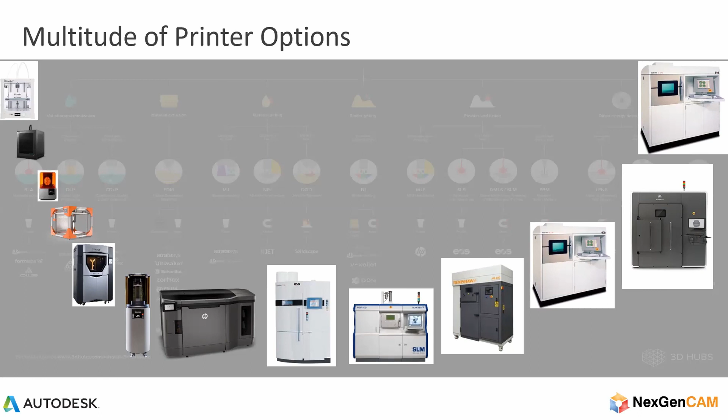Another challenge that we're seeing is failure. It's interesting the way that the 3D printing market started is kind of entrepreneurial and everybody's doing it. It's so exciting to be able to print something instead of making something in the traditional way. And we've all kind of settled in and people are comfortable with the current state of the industry where you might print 3 or 4 bad prints before you get the one that you like.

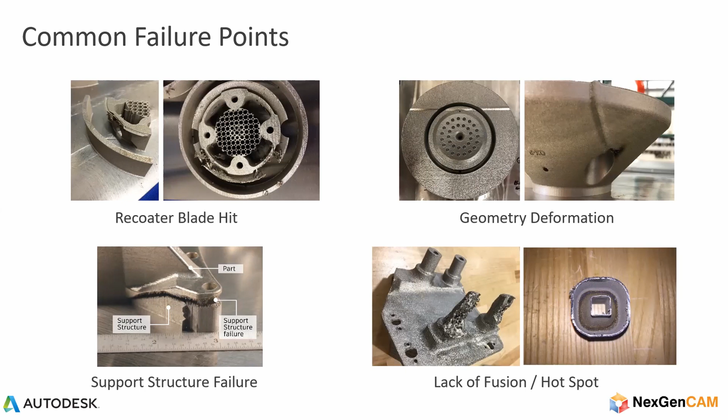And it could have been solved potentially by just doing a 15-minute simulation or some work in advance to look at it. Support structure failures are also common. This lack of fusion with a hotspot down here, this is another common error. And we could go on and on with these challenges in the industry.

Some additional common issues that people have are packing parts and build plates and tracking all of this and making it an efficient, fluid process for folks. Also is just the post-processing. A lot of times it's left out of the discussion until later, and then it becomes a problem. But trying to plan for that in your process is a common issue for people in this industry.

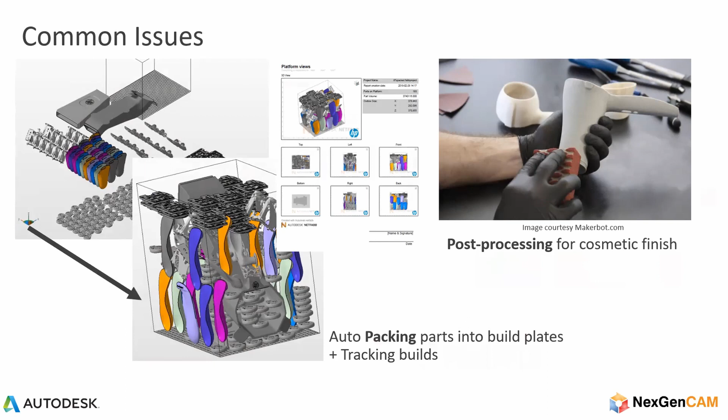If we look overall at the challenges in part design with printing, one of the greatest challenges is that complexity is free, and you actually have more fidelity, more ability to produce complex parts with this as a manufacturing process.

But oftentimes your design process or your upstream thought process isn't as complex. And so bringing this in and adding in complexity is almost counterintuitive to a lot of us. And it's something we have to change and think about differently in the way that we do things.

Lightweighting is also obviously a big goal. You want to reduce your material costs, increase your performance. We start thinking about structures and scaffolding and the things that go around a part. There are really intricate and good ways to solve these problems, but it takes a little bit of trial and error. And so you want to be simulating, you want to be finding efficient ways to deal with that.

Also in 3D printing, there's a lot of expectations. Everyone is excited, like we've got a 3D printer, we can start getting results faster. We can iterate our solutions more quickly. We can do a heck of a lot more things. And so with all that anticipation in the business, you've got a lot of stakeholders. And often they're thinking the cycle time is going to be quick. And if you just go about 3D printing without having a good process in place, you can be a little underwhelmed with that.

Also, just limited material candidates. So you may or may not have an idea of all your different material options and how you can go about solving something, when you're taking a traditional process where you knew material selection in the past and you have more options here.

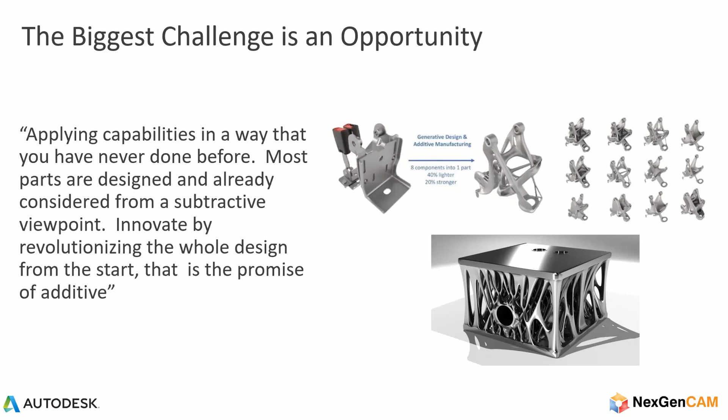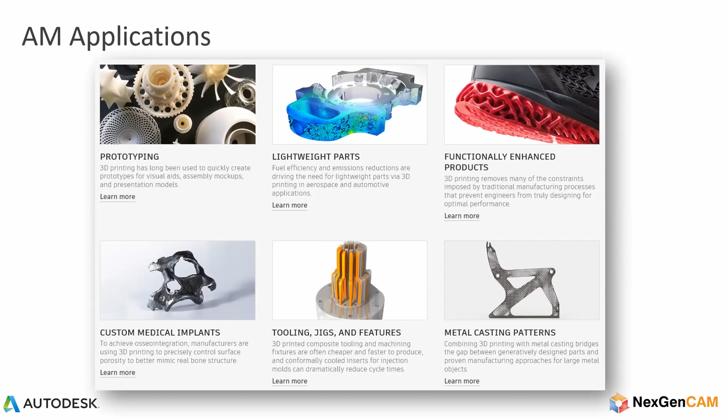We think of all the time spent on fixtures and jigs and supporting structures. This is kind of changing the whole game with how it is that you can come up with these. And then even moving into metal castings and patterns. There's a lot of options and things that are out there. So let's get into Netfabb. This is an Autodesk solution.

And when you think about it, what it's really doing is it's a bridge between the digital and the physical. It is going to help you quickly take something that's in digital CAD, which is a very accurate record that you have, and bring that into being a physical part. And you think of all the challenges we talked about with warping, and when you print, there's just a lot more challenges that we don't normally see on the subtractive side that we know really well.

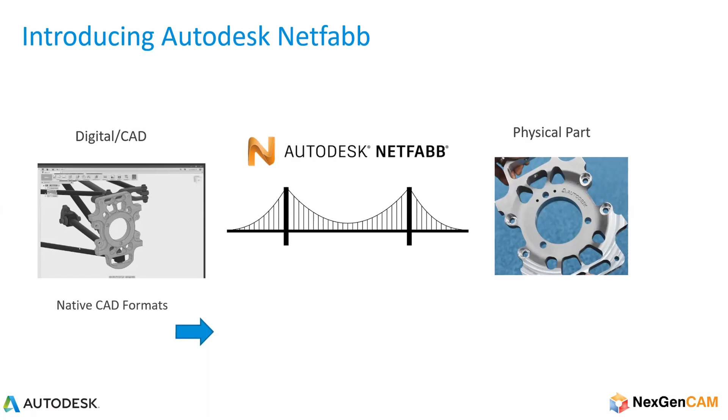So some of the things that Netfabb is doing in here is working on this conversion of the file and bringing it in, healing it, so to speak, supporting and scaffolding, packing, mesh manipulation, slicing the layers in there, and doing even just basic simulations so that you can get a good analysis and come out the other side with a printed and machined part quickly. This is what Netfabb is doing, and it's doing it really, really well.

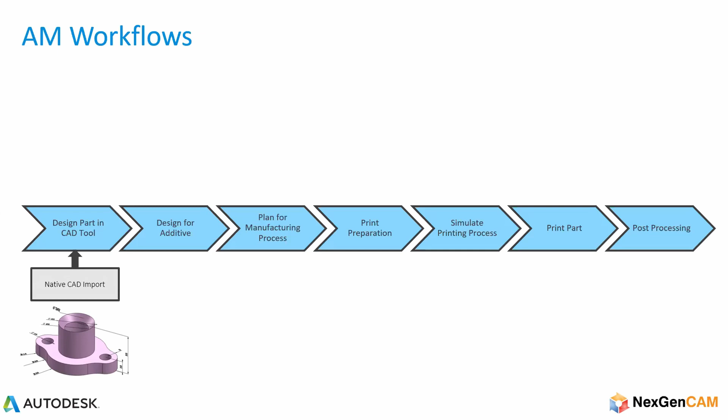Let's look at the workflow at just a high level. The first step is obviously we want to get that native CAD and import it in. So you're going to be able to do that really well with this solution. The next thing that you're looking at is, how do I design for additive? I want to change things. I want to have latticing. I may want to generate a completely new design that hasn't been done before, while still holding the goals and the needs of the part in mind.

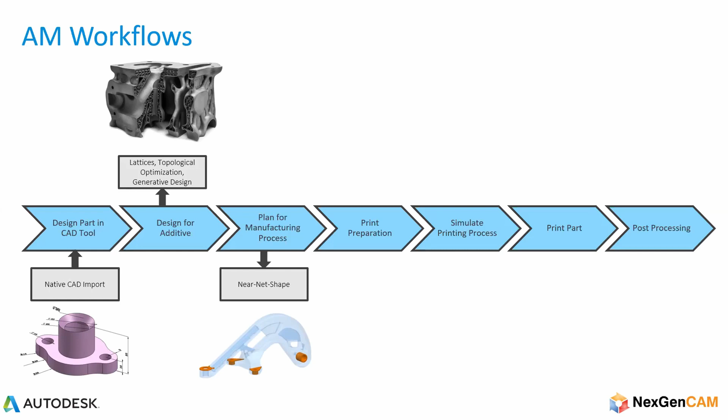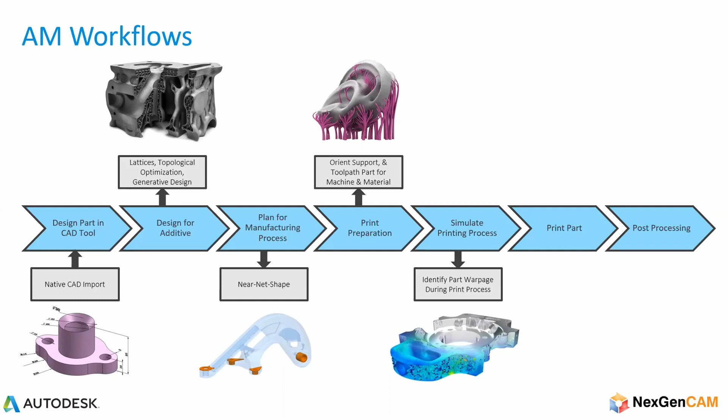I may want to make a plan for the manufacturing process and make sure that it's not just the part itself, but the whole DFM, design for manufacturing, is planned and thought out. I also want to think about the print preparation. Am I making something in a way that's logical, and how is the best way to support this in the build process? And a step that often gets skipped for most folks is just simulating this. Let's go through and make sure we're going to get the part we're expecting. It's going to have a big impact on your cycle times.

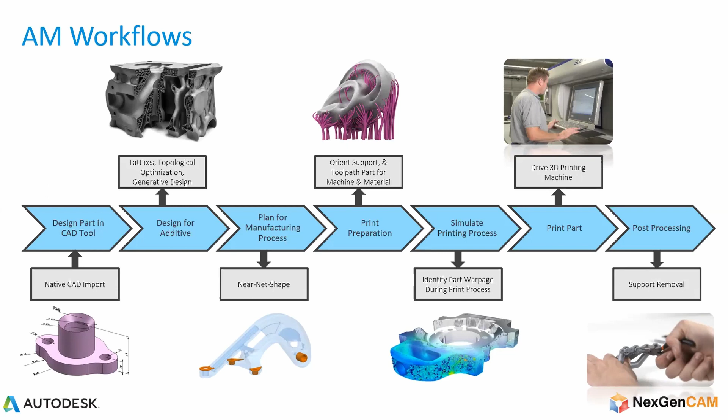And then the actual printing of the part, you'll see there's an integration with Netfabb into a lot of the solutions out in the market. And then obviously planning for the post-processing of the part. So what we want to do next is just take kind of a real world example. This is just kind of for fun.

Cory, as he's known to do, out boating around on the lake, one day was just kind of realizing his boat wasn't as fast as everyone else. And he started thinking about propulsion and, hey, how do I get my boat just a little bit faster? And traditionally in the past, you just throw that thought away. You just say, you know what? I don't have the time and energy to get involved in something.

But you throw in this Loctite printer that Jeff had at Hybrid, and pretty soon we're thinking like, hey, we can do this project. And what we want to do is kind of take you through this project and show you how we're going to go about building up this part for the first time and moving to full-scale production as the business grows over time. So first of all, we went to Jeff, and he was able to help us print the first and the second different iterations of this. I just wanted to go to Jeff next and talk about his experiences overall.

And I thought it was really interesting, Jeff, when you were describing your company at the beginning, when you think about building a brand new company from scratch, which is kind of what you've done the last year. A lot of people ask that question, if I could start all over again, what would I do? And you kind of have had that chance, and here you are, you're focused on Industry 4.0, and you've got additive and subtractive working together, and you've got 7 machines in here already. And it'd be great if you could just share some of your actual experiences using this.

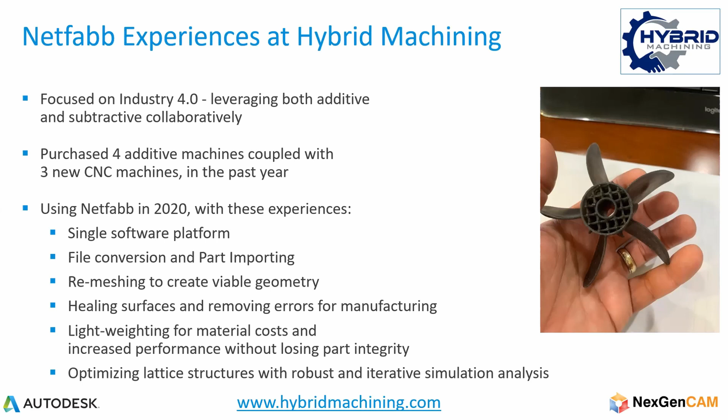We're going to go through this propeller example, and we're going to start at the prototype stage where Jeff was able to help us to get success on our first print and get something going. Then we're going to move into the professional stage where, hey, we needed to get a higher production volume. And then we're going to move up to the metal integration stage where customer demand just pushed us to have an even better metallic part for different performance reasons. So we're going to use this example to move through this.

Cory, at this point, we're going to move over to you. He's going to take the initial part and do the prototype section. He's going to work on importing, healing the part, scaling it, duplicating it, slicing it, and printing it through the whole process. Thank you, Eric.

So we're in the prototyping stage of this propeller. And so I want to be able to print this so I can hand this off to some colleagues, some friends and family, and they can give me feedback on how well this performs, as well as myself. So I'm going to bring this part in.

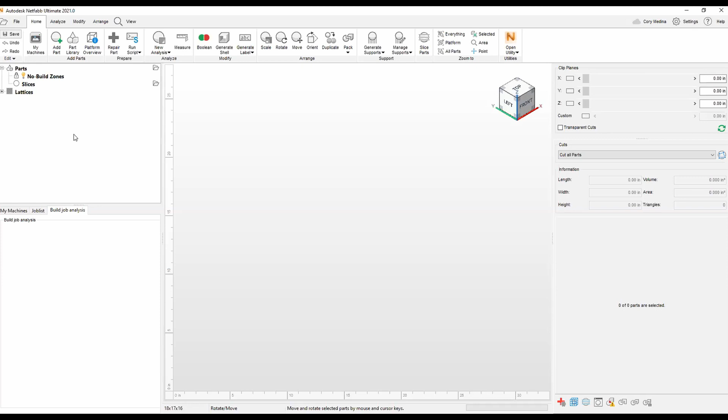And I'm going to add it into Netfabb. So the nice thing about Netfabb is right off the bat, it tells me if this print is ready to be printed. The little warning sign at the bottom here is telling me that this particular model that was modeled up for me could have some holes in it. It could have some flipped surfaces, and it can also have some degenerate triangles.

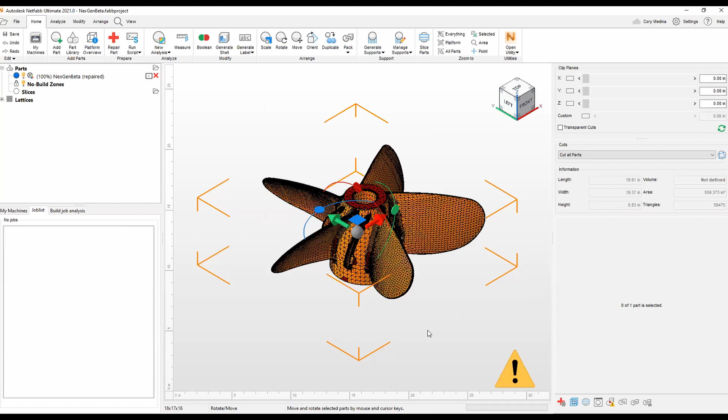And all of those types of issues with the model actually result in poor print quality and also will cause the printing process to take longer as far as calculation times and actual printing. So within Netfabb, I can run a repair script. And what that does is it will automatically repair my model and let me know that it is now good to print.

So now that it's good to print, we can actually start to put this on our platform and make some design changes. So I have my platform loaded here, and right off the bat, the size of the model is actually a little big. I want to start at a scaled down version of this just for my prototyping process. And that's really easy to do without losing any of the part integrity, is we can scale it down in Netfabb. So I'm going to scale it down by 20%. And then I'm going to move it to the left front of my platform.

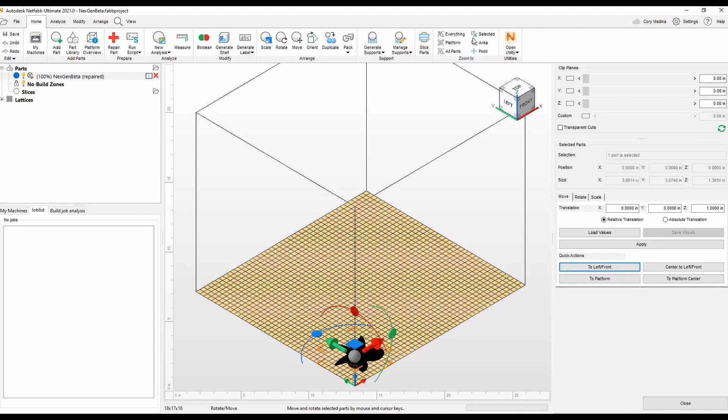So now that I got it scaled down, like I said, I want to print as many of these as possible, and I want to hand them out to people to test so they can give me feedback on them. And so I need to duplicate this. I'm going to duplicate this model, and I want to fill my platform. I want to make as many of these as possible for this first initial print. I'm actually going to change the distance to the top of the print bed because I can only do one row of these at a time.

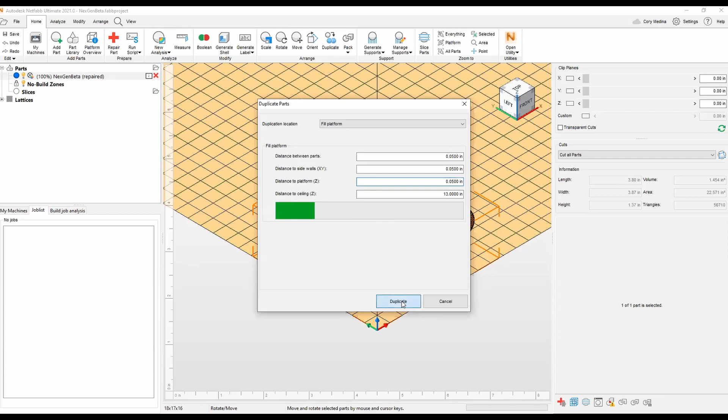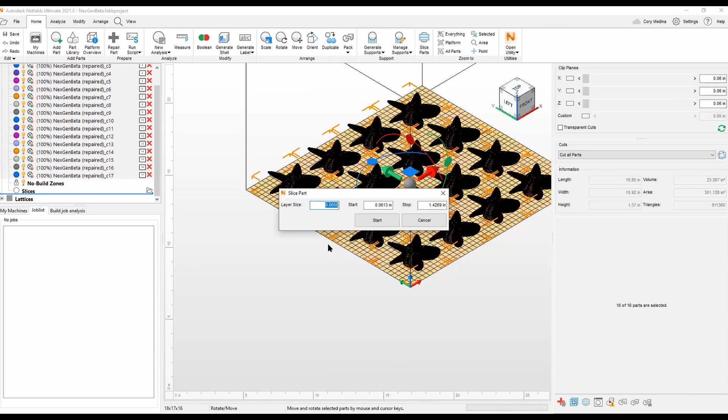And so now that I've filled my whole bed, now I'm ready to generate a slice file. So to generate a slice file, I just select any of the parts that I want to slice. So in that case, that's going to be all of them. And I'm going to drag them down to the slice section. And what pops up is, how are we going to slice this? What's the layer size going to be? Where do you want to start and where do you want to end? So I'm going to start from here.

And then in our slicing generation, we can actually play through and we can see how these parts are going to be printed on my platform. So right now, you can see that this is actually how they're going to be sliced. And right off the bat, I noticed that I actually want to generate a filling in these slices to fill in all these gaps. So that's real easy to do in Netfabb and automated. Just select the parts that you want to add filling to and do a generate filling. So I'm going to do just a quad islands filling.

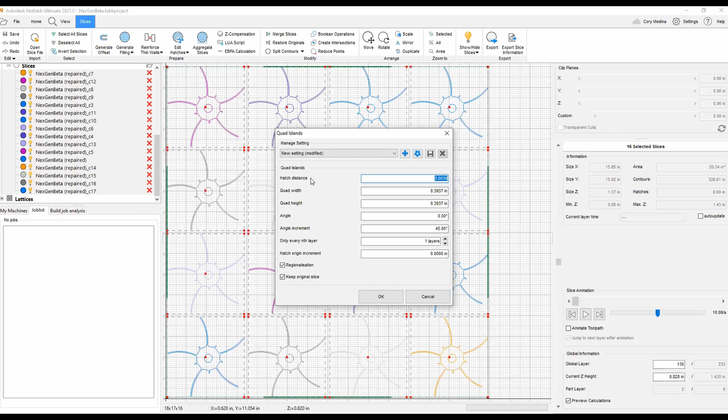And then once again, depending on your preferences for how you want the filling to be made up, you have a lot of these options: hatch distance, the width, the height, and so on. So I click OK, and you can see now I have a filling. I can animate this. I can actually reset it down, and I can play it. And so now this is how the slice file is going to be sent to the printer.

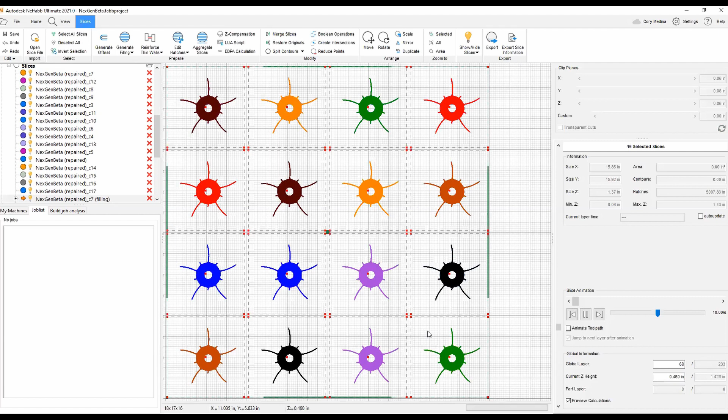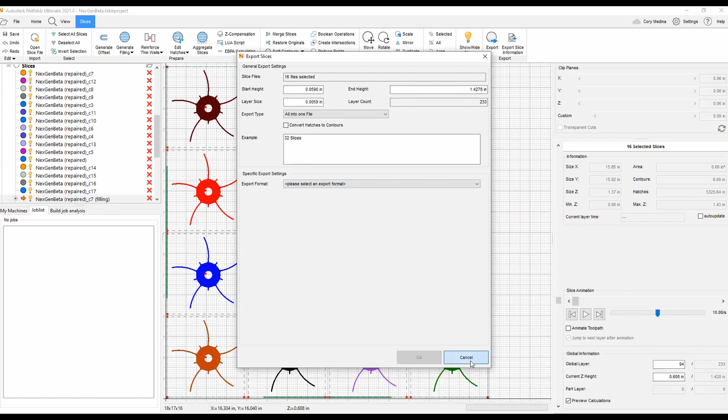Once I like what I see, I want to send this to the printer, I can go to export, and then I could export it as a universal slice file, or if you have a different format, maybe you need a slice layer interface. We have a lot of different formats that you can send this slice out. You can also send out a CSV file as well, okay? So this is ready to go to my printer.

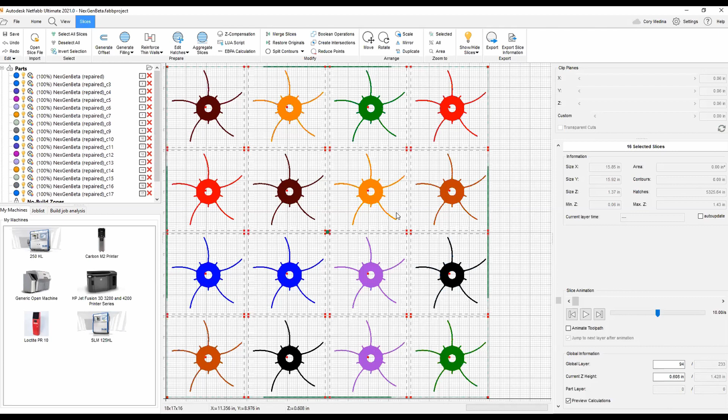But another thing that I wanted to do is I have a friend that has a Carbon printer as well. And so he said he would print this propeller for me in a different type of material. So what I'm going to do is I'm just going to load up his printer. And I'm going to drag one of these files into his printer, and then I'm going to scale it, or actually I'm going to place it. So place it at the center of the platform.

And then from here, I could actually use Netfabb to send this out. So you can see we have an integration with Carbon. So you add parts, auto placement. Once this is all ready, once my supports are done, I can export the file.

If I had multiple files on here, I could just export each individual part. Or if I wanted to do everything that's on the platform, I could export the job. So I could actually arrange all this for him the way I want to have it done, and then just send him the file of the job, and he can print it for me. And so now that we're done with the prototyping stage, we're ready to see what the results are from all of our beta testers.

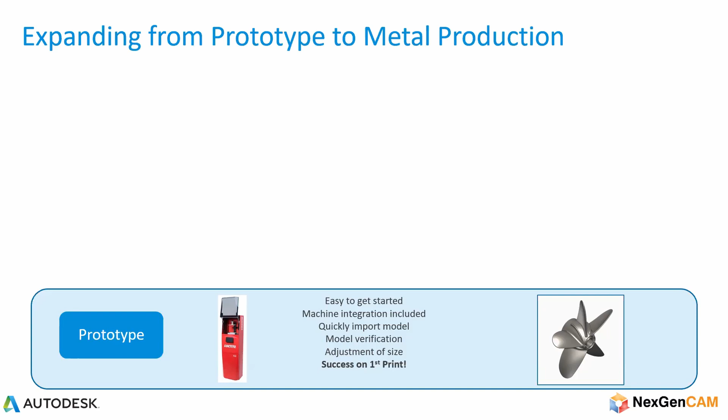Fantastic, Corey. It's great to see that you've completed the prototype. And so we've kind of finished this first plank that we had in here that we wanted to go over. He's got a successful first print very quickly. And now we're going to move in to the professional stage. He's had a little bit of success in the market. The requests are starting to roll in for more business, which is what any business owner would love to hear.

And Corey, we're going to move back over to you, and you're going to go and talk about your requirements for buying a new machine, adding latticing, and producing at a higher volume. So I've gotten feedback on my part, and the reviews are great. Everyone loves them. They've actually told their friends and family, and a lot of other people have heard about them.

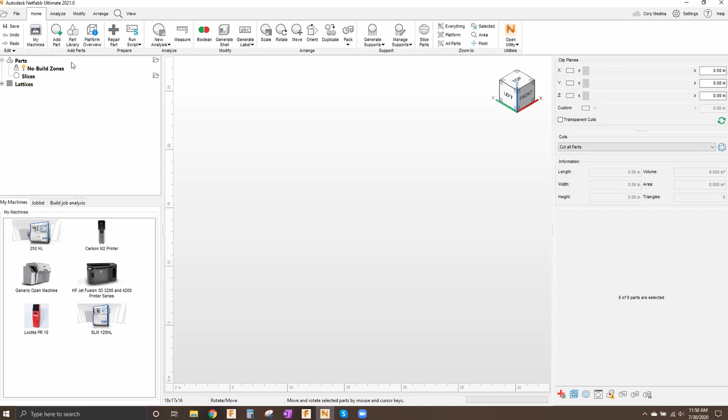So the demand for this part is starting to get to a point where I need to move up to a professional printer. But I also want to do a design change as well. I want to throw some latticing into this part, to make it a little bit lighter. So I'm going to bring the part in. And once again, you can see the part's in. I don't have an error code at the beginning because with the import wizard, you can actually set it to automatically repair the part as you bring it in.

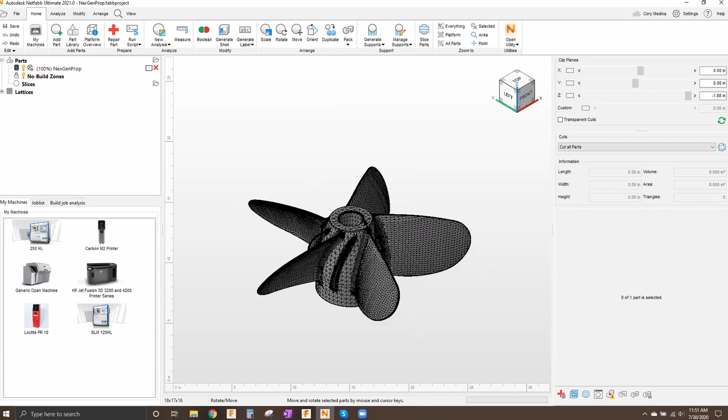So like I mentioned before, I want to make a design change. So what I want to do is I want to take this hub and I want to hollow it out and add a lattice to it. That's really easy to do in Netfabb. We would just drag this into our lattice commander. And what the lattice commander will do is help us hollow out this part and apply a lattice structure to the inside of the part.

So the first thing I want to do is I want to hollow out the part. So I click on hollow, and then it's going to generate a skin. And then you just tell Netfabb the thickness of the skin. So I'm going to go 200 thousandths on the thickness of my skin and hit generate. So now that I have a skin generated, if you want to see kind of a cross section of what that looks like, we can do that quick and easily in Netfabb. So that's kind of what the skin looks like.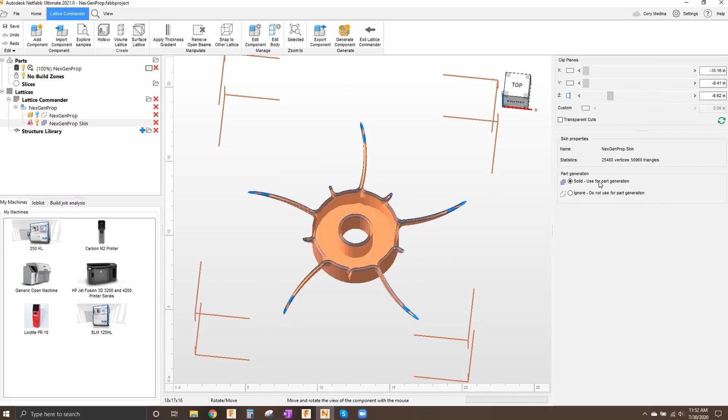And then we can drag this up to see what the skin looks like as it transitions to different levels in height. So now that I have my skin generated, what I need to do is generate a volume lattice. So I'm going to click on the volume lattice, and then from here, we have a lot of different options. We can choose a topology, which is basically the cell structure of the lattice. So a lot of options are currently available in Netfabb. We have grid, X, star, all the way down to like a tetra.

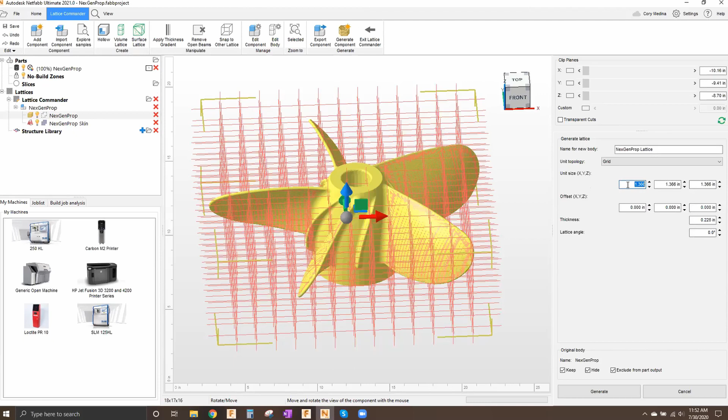So just depending on your preferences, that's the topology that you would pick. I'm going to stick with the grid. And then I'm also going to change the size of my lattice to 1 inch by 1 inch by 1 inch. So each one of my grid sections is going to be 1 inch by 1 inch by 1 inch. You can also do some things like offsetting the lattice. So if the lattice wasn't quite following, maybe it was sitting right at the top and you want to shift it down a little bit, that's where you would do your offsets.

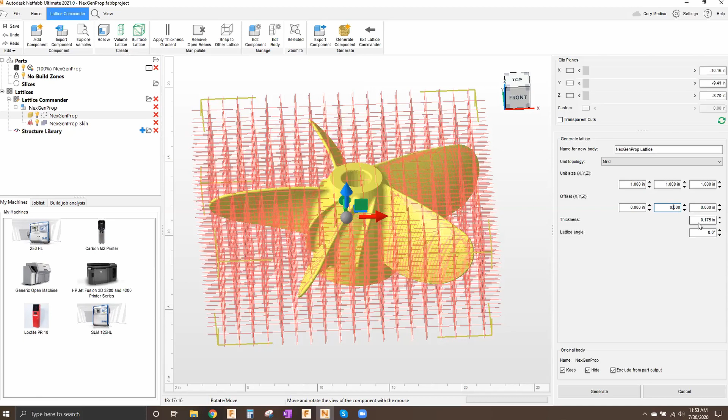You can also change the thickness. So I'm going to change my thickness to 175 thousandths. And what this is, this is the thickness of the beams of the cells. So each cell would be comprised of a series of beams, and so this is what controls the size of the beams. So I'm going to click on generate. And so now I have a lattice and I have a skin.

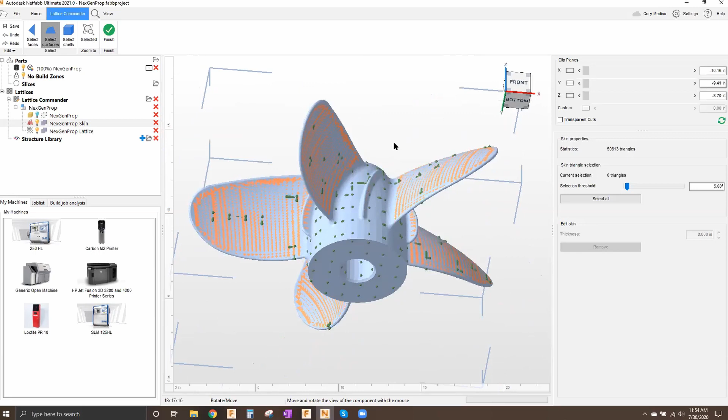Another thing that I want to do is I actually want to edit the body a little bit. I want to remove this top and bottom surface so people can see that it's latticed. So I just go back up to the skin and I'm going to do an edit body. And so I'm going to remove the top and bottom. So I'm going to change my selection threshold to 5 degrees and I'm going to select the top. And then I'm just going to remove it. So now that this is removed, we can see the lattice inside of the part. I also want to do that with the bottom. So you can see the lattice going through the part.

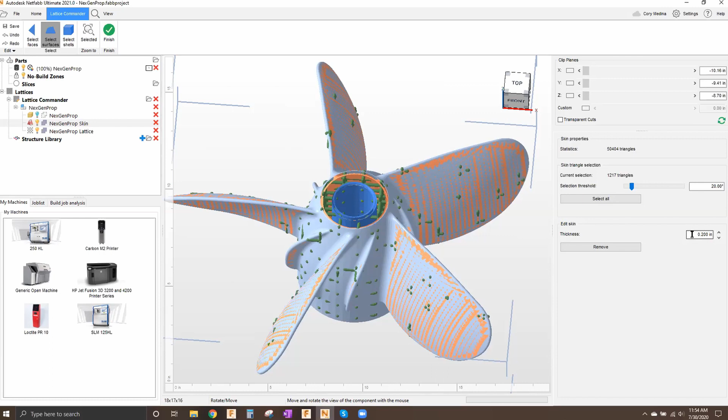The last thing I want to do is I do want to thicken up this hub right in here. So I'm going to change my selection to 20 degrees. And then I'm going to select this middle hub. And I'm going to change my thickness. So if you remember earlier, I hollowed this part out and all of the walls are 200 thousandths thick. I actually want to change this to be a little bit thicker. So I'm going to change it to 300 thousandths just to thicken it up a little bit.

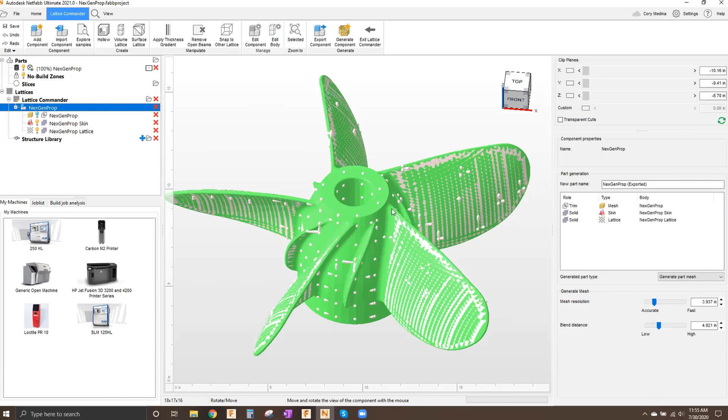Once we're done with making the modifications to this, we need to go back to the main page of our lattice commander and we need to generate a component. So what this is going to do is generate a lattice for us and a skin, and then it's going to trim the lattice and the skin to the actual size of the part. So I'm going to do a generate component. And so now what it's doing is the generation, trimming any intersecting surfaces and removing any open beams that aren't connected to other beams. And so we just give this a minute to generate our component. Once we have our component generated, then we'll be able to load in our new printer and fill up the platform and do a print.

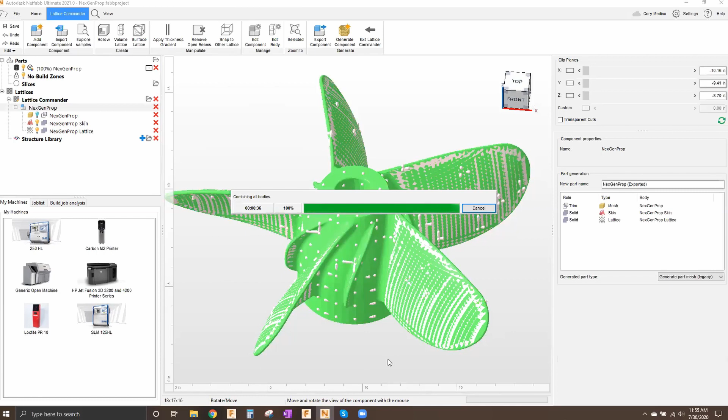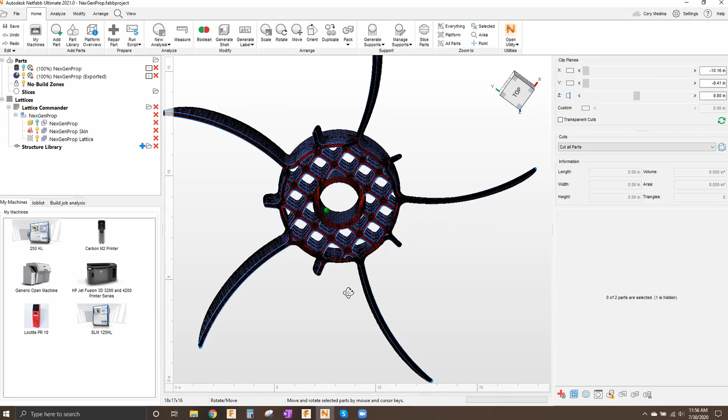So now I have my old part and my new part. So this is the original part, so I can just hide this, turn the light bulb off, and then go back to my new part. And then if we want to make sure that the lattice looks good, it does. I can even do the cross section once again, just to view what the inside looks like. So the nice thing about removing these faces is it's also a way for me to get the excess material, excess powder out of this part when I print it. So I can see the lattice looks good, the fins look good. So now I'm actually ready to print this part.

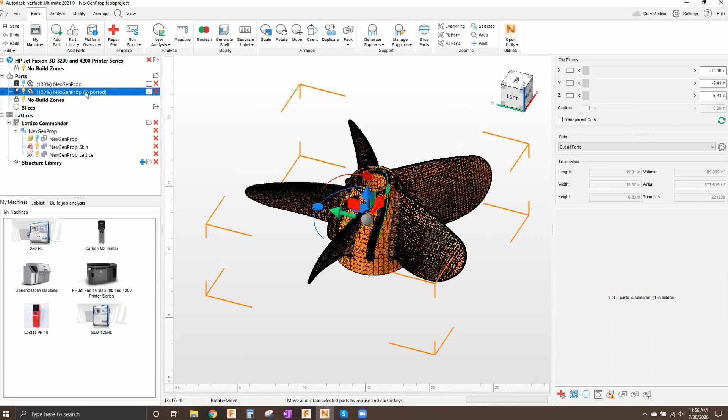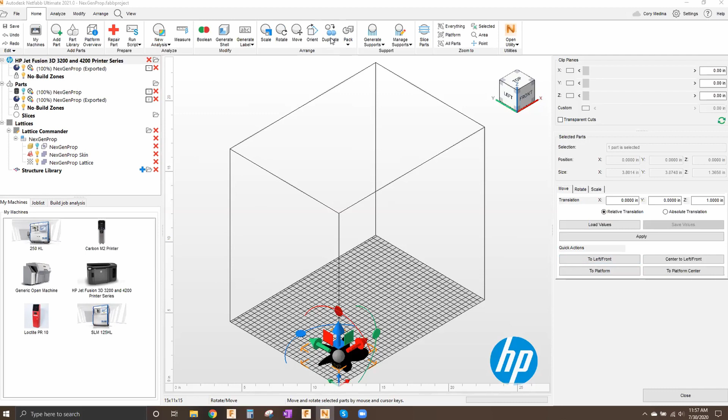And so like I mentioned before, I'm going to use an HP Jet Fusion printer. So I'm going to load this printer into Netfabb, and then I'm going to drag my newly designed part into the printer space. I'm going to scale it back down to the size of 20%. And then I'm going to move it once again to the left front platform. And then I want to do the same thing I did earlier. I want to print as many of these as possible so that this thing can run overnight. So I'm going to do a duplicate once again. The nice thing about this machine is I am able to print parts on top of parts. So I'm actually going to change my distance to ceiling to 1 inch. And then I'm going to duplicate it.

So now that this platform is filled with as many parts as possible that I could print, I can actually go to the interface, and if I were connected to an HP machine, I would have the option to view the job list, edit the job settings, and export the job. I also have the ability to directly connect to HP SmartStream 3D Build Manager within Netfabb. And then also we have the ability to send the job to the machine directly from Netfabb. So now that my production stage is done, this print is running, I'm able to send these out to more people that are requesting them, and ready to hear their feedback.

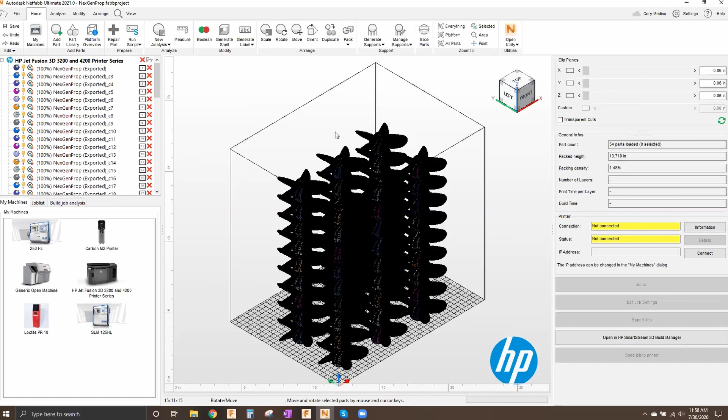Wow, Cory, you're really just motoring along and moving along. Congratulations on your success and getting more of these out there. It's really fun to just watch how this can quickly build on itself and continue to expand.

So as we head into the next phase here, there's some additional capabilities. We may or may not cover all of these, and I just want to make sure everyone that's out there listening has an idea of the full capacity and capability of Netfabb. So if you think about, at some point you may have multiple machines. Let's say you have all 3 of these machines in your shop. You could be running all of them through one interface, through one solution with Netfabb. And that's kind of what Cory's showing as he progresses.

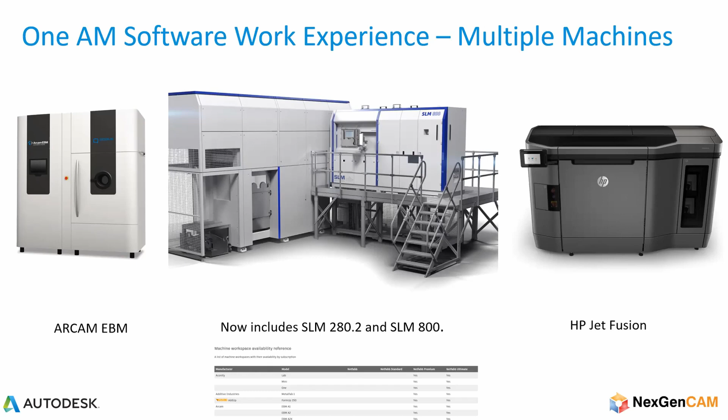And as he moves into the metal integration, he's going to need another printer, and so he's going to go over that. There's also, I want to highlight, online you can go out and see a full list of everything that's available, all the machines that are hooked up and connected to it. Very easy to pull this up online. You can see it at the bottom of my screen here, but it's much too long to show and go through at this point.

The next thing I wanted to go over was just part orientation. And, for like DLP, you may need to find some required supports. It's a really great environment for changing angles, moving the orientation around. I kind of like just watching it because you're moving and changing the part and it's redoing all the support structures for you. You can set and use anchor points in here. You can see the load inside the part. You can adjust the transparency to see inside of the support entities as well. Just a lot of flexibility here for you as you're getting ready to print this.

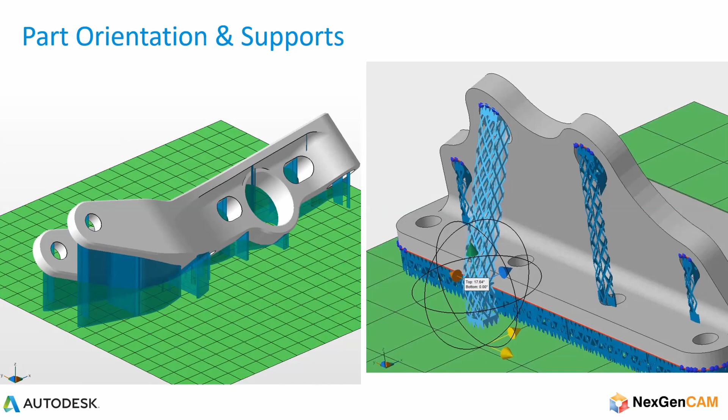The next thing is the orientation recommender. And this is really good because you can set all your custom weightings. So you can set supported area, support volume, outbox volume, center of gravity, part height, unsupported triangles, and several other things that you can set in here. It's a really great environment for you to do a lot of the different things you might want to do to get this going.

Next, I'm going to move over to just the automatic support creation. The OEMs and customers all have access to this for their advanced supporting capabilities. So if they need to do more with this, there's just a lot of capability. We're showing some of them here. There's also polyline and volume available for metal that we're showing there. So just a lot of support. We won't have time to go over all this, unfortunately, with Cory's presentation.

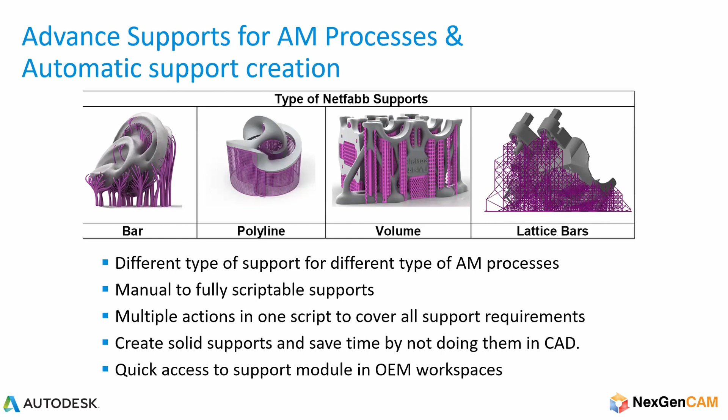And then we get into editing the support. So you can see here on this screen, we're just showing kind of a light blue there. We're editing and moving that one around. And so you can get down into the detail level and work with just one of these at a time. So at this point, I'm going to hand it back over to Cory. We continue this journey into metal integration. He's going to talk about getting another new machine and orienting and supporting the parts and running through simulation.

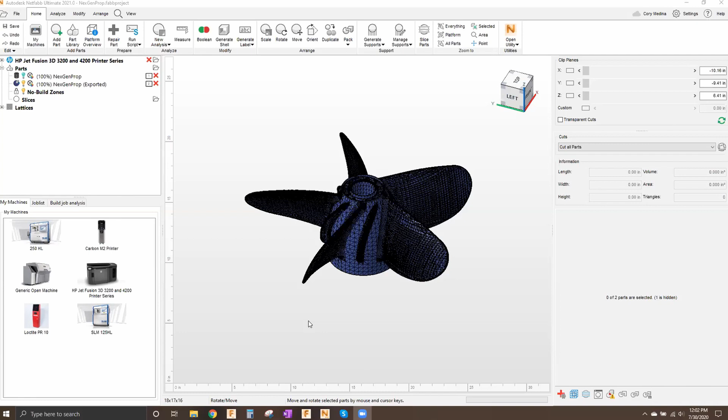All right, so once again, I've had great reviews on the parts, and I'm actually getting requests to print this out of metal as opposed to plastic. And it gets to a point where I get enough people requesting this from metal that it makes sense for me to buy a metal printer and prepare to print this out of metal. I definitely need Netfabb's help to do that because I don't know much about support structures, and the automated support structures and orientations will help me have a successful print the first time without having to waste any material and time.

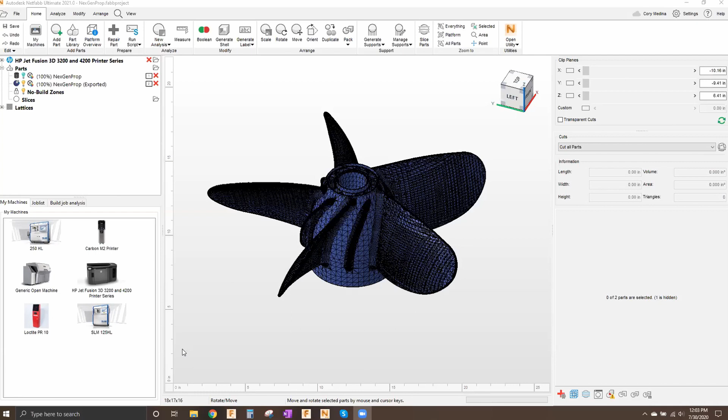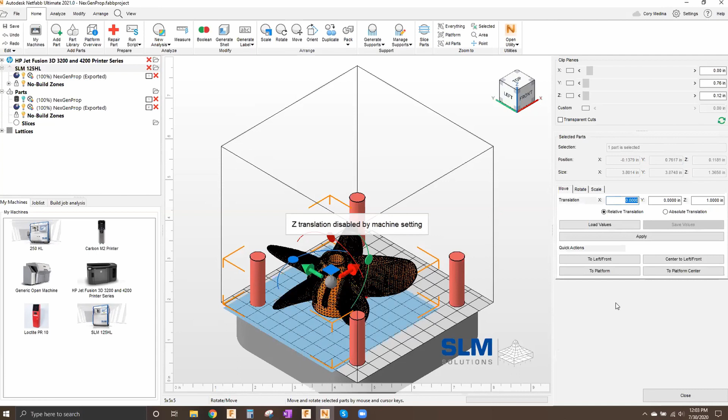So I have my original part here, and the first thing I need to do is bring in my printer. So I'm going to use this SLM 125. Once again, I'm going to drag the part into the build space. I'm going to scale it down to size. And I'm going to move it to the platform center. The nice thing about Netfabb is it has an interface. It's kind of like a workflow that's going to guide me into printing this part.

And so the first thing I need to do is, you can see that we have a configuration file. So we're going to use this type of material. And then we can set some preferences based on what the machine manufacturer recommends. So a distance to part and platform. We can tell it what the build plate thickness is and so on.

So we're going to orient the part. What this is going to do is search through a series of orientations, and it's going to show me a lot of different options I can choose from based on what my preferences are for this particular print. It's going to use a 45-degree critical angle to calculate where the supports need to be and allow me to change to the different types of orientations based on that critical angle. So basically what we're saying is anything less than 45 degrees needs to be supported, and anything above that, based on what the machine manufacturer has told us, does not require supports.

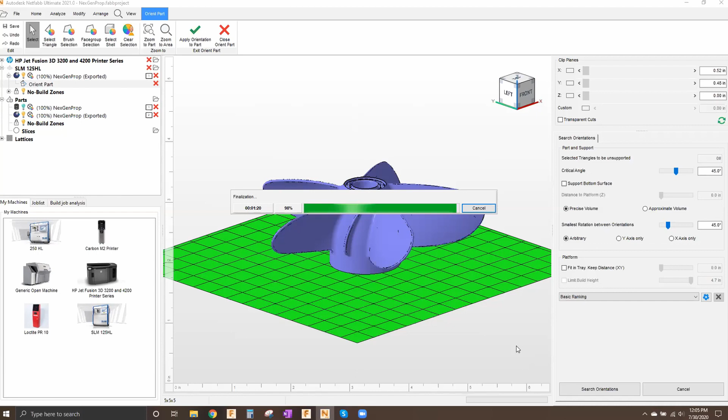What this is doing is actually going through all of the surfaces of the part, finding all of the angles, and then it's going to give us a series of orientations that we can choose from. From these orientations, we might choose one orientation at first because this is our first print. Maybe we want to make sure that it's fully supported. Then as we get better with this print and more familiar with how this part gets printed on our machine, we might be able to change to a different type of orientation. So this is how the orientations work.

The first column is a ranking system, and this is kind of like an average of all of these. So this is a best case scenario, if you want the best of all of these categories. That's what this first ranking system is. The next one is supported area. Maybe I want to support the least amount of area on this part as possible because I don't want to clean up very much of it. So I can click supported area, and then I can click on the top ranking for supported area. So this is the least amount, and this would be the most, okay?

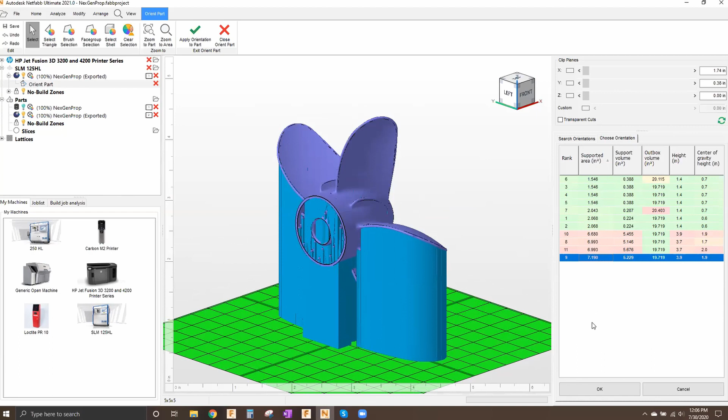Support volume. Maybe because this is something new to me, I'm worried about spending a lot of money on materials. So maybe I want to orient this part to use the least amount of support volume as possible. And then we also have an outbox volume. That's going to be the smallest outbox. Basically, it's going to create an invisible box around the part from top to bottom, okay?

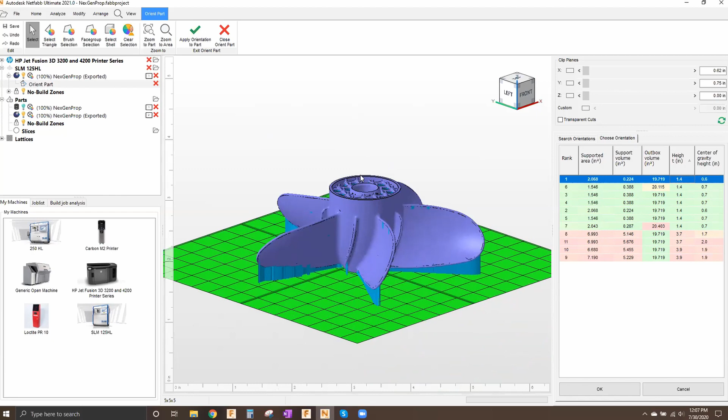Or maybe we're concerned with height. We want to keep this as close to the platform as possible, so we could change this orientation to height. And then we also have center of gravity as well, if you're concerned with this. What I'm going to do is the outbox volume orientation. As soon as I click OK on this, the nice thing is Netfabb automatically orients my part, and so I can move on to the next step.

If we had supports created already, we can import those supports. If we don't have supports to import, we can move on to the next step where we create supports. This opens up our support creation module. What we can do is just run one of the support scripts that comes with Netfabb, which is good news to me, because if I was to support this on my own, I really wouldn't know where to start. We have a lot of different options to choose from. If we were doing this for a DLP machine, we could do DLP. Obviously, we're going to do the SLM option. But there are other options as well.

There's powder bed fusion light style, powder bed fusion massive, and powder bed fusion strong. We also have a new DLP strategy, a tree root with anchors, so it creates a bouquet of supports where it's connected to the part, but to the platform it's just one big trunk. And there's also this new scaffolding type of support, which builds supports around the part with minimal contact with the part, so this one's kind of nice.

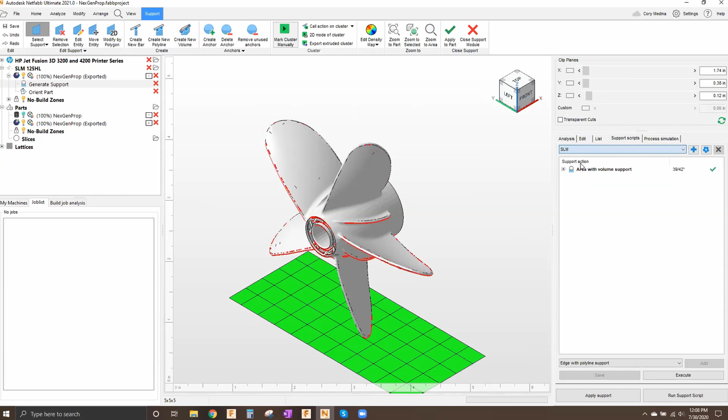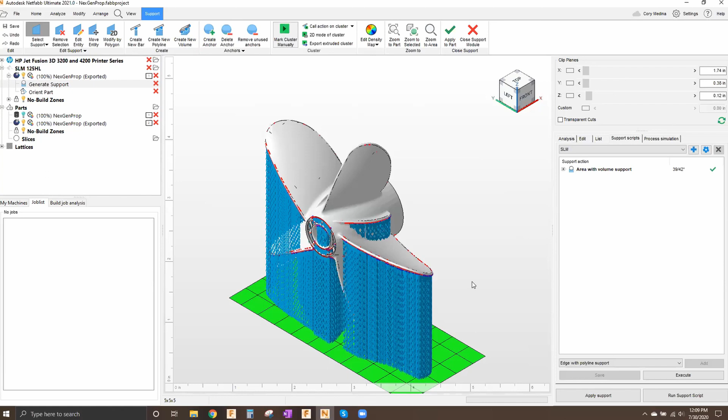Like I mentioned before, we're going to do this SLM support script, and what it's doing right now is using these values that have been created to calculate where supports need to be on the part. Right now it's using the critical angles, and it's also using the settings that we've made to create supports on this part. So now we can see this is what Netfabb has done for us.

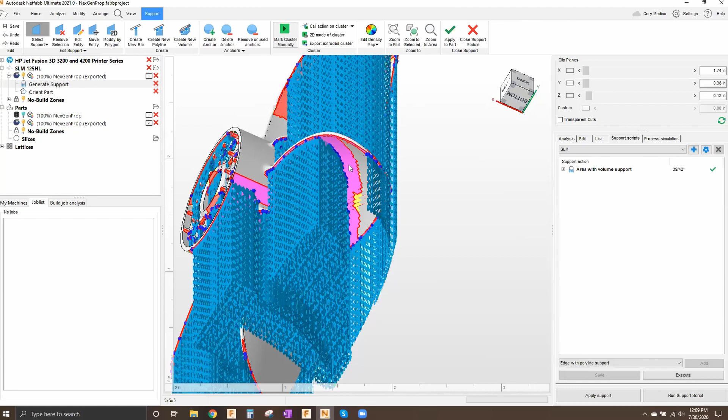And it looks pretty good, but since this is my first print, say we want to add some extra supports, or maybe we've printed this before and we know that this part needed a little bit of extra, we can make modifications to support. So I could select this whole cluster and add a little bit extra support. I want to add some polyline support here, just to give it a little bit more structure, help the build out. And so we'll do that there.

And then we can select this cluster as well, and we can create a polyline support on that as well. So you can see, even though it has supports on there, we can add additional supports to those structures. And then we'll do this one as well. Like I said, I'm just doing this because this is my first print and I want to make sure the part is fully supported.

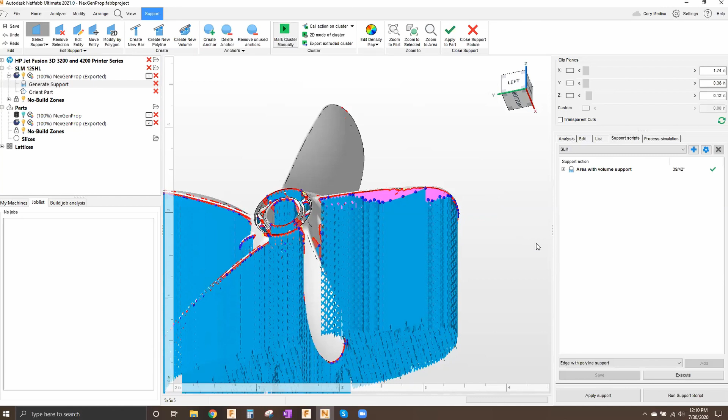And so now that I have those on there, another nice thing that I can do is I could click on this individual support and edit it. So I can right click on this and edit it. And then these are all of the values that go with the support. So it's a polyline type, distance to part, smoothing distance. There's so many different options in here that you can change and make work for you.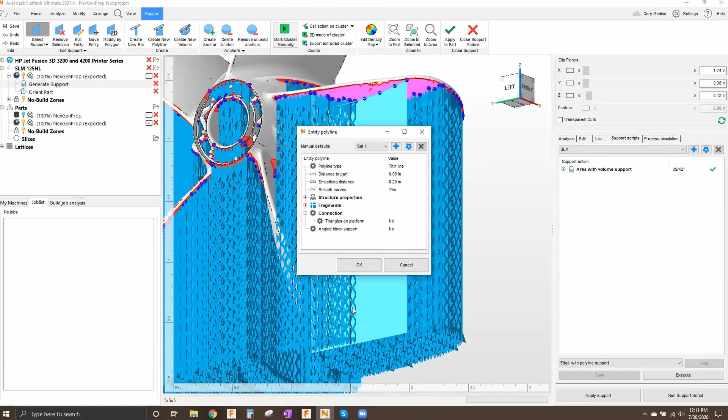Structure properties as well. So you can set the border width, the connection. For instance, we know that this is just extra support, so we don't need these triangles on the platform. So we can say no to the triangles on the platform, and it automatically removes them. So you do have a lot of flexibility when you are running supports.

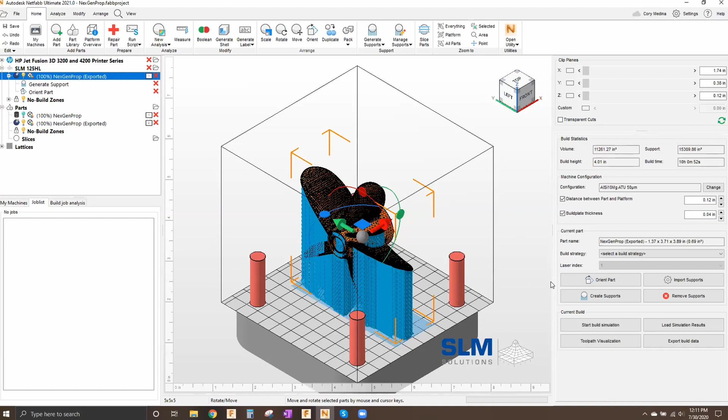So when you're happy with the supports that have been run, we can click apply support. What that's going to do is automatically apply the supports to our propeller. If we didn't like what we see, we could click on this next button, which is remove support. So we could remove the supports and start all over.

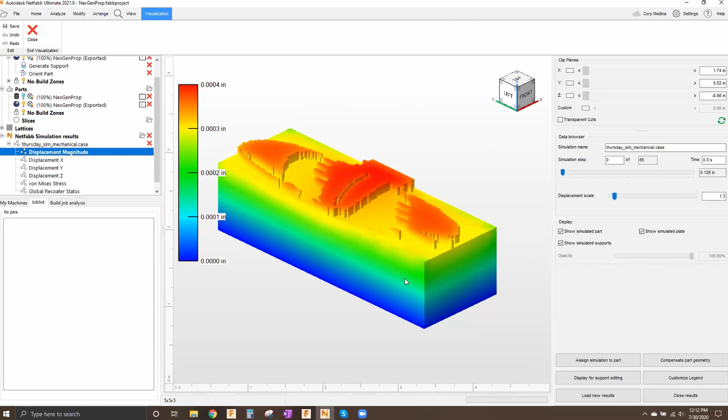From there, because this is metal, we would want to start a build simulation. Once you run a simulation, you can load your simulation results, and we can show this to the customer, or to anyone that wants to see it. Maybe we need some guidance on where these hot spots are, so we can show them the mechanical side, the displacement magnitude, and we can see that we have a little bit of displacement here at the bottom at the support side, but as we progress through the part, it starts to get a little bit better.

And once we run this fully through, we can see that we have a finished part here. We can also see the displacement in X as well, and the von Mises stress. And then we can also check to see if there was recoater blade interference. On this simulation, it's telling us that there's no recoater blade interference. And we can close our results and go back to our print. So we've done a simulation, we've loaded our results.

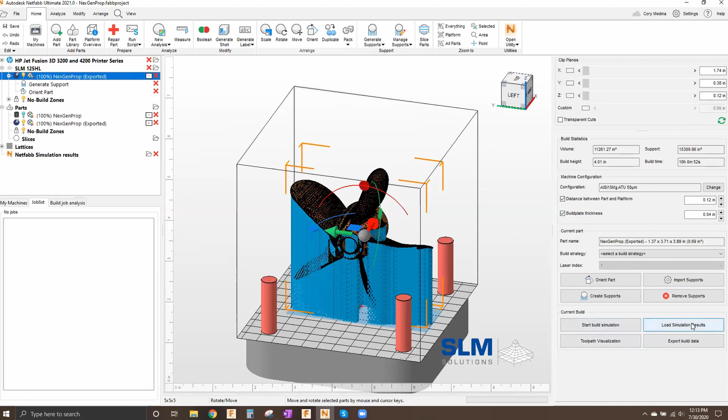We can also do a toolpath visualization. What this does is provide an interactive playback of the generated toolpath. Once it's generated, the toolpath and its visualization will become available for examination. Basically, this is going to show us how this will be printed on our machine.

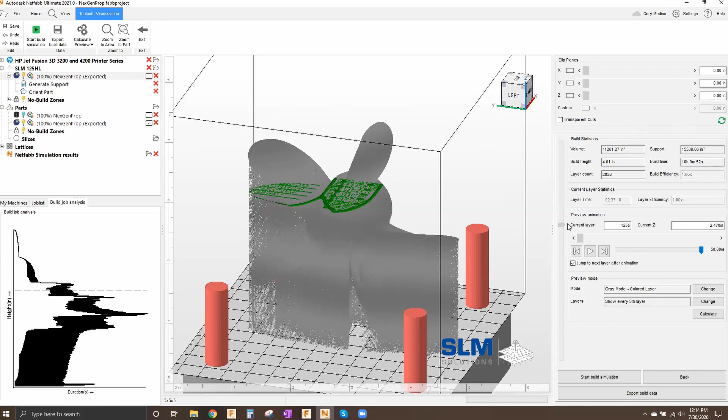So if I hit the play button, it's running through all these different layers, and I can pause this or speed it up a little bit, but for each layer, it's showing us how it's going to be done with our printer. So we can scan through this, and then we have different options in here as well.

We can go to change, and these are the different settings we can choose. We can do a fully colored model. Right now, the one we have set is a gray model with a colored layer, so our layer is green. You can also do cut at current layer, and that's going to show the model being built from the bottom up.

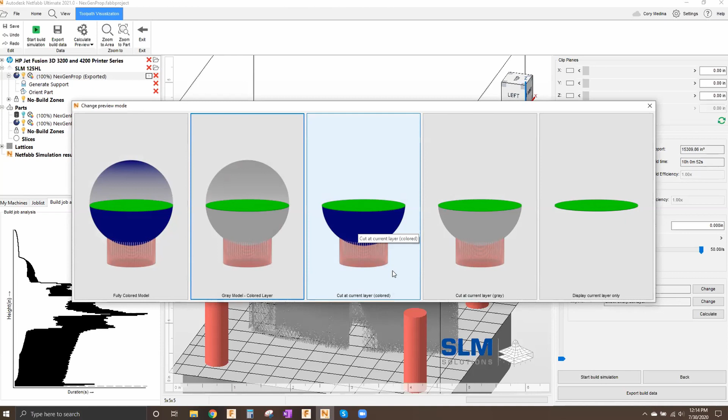So once you've looked at this toolpath and you're happy with it, you can export that build data, or we can go back. So now we've basically come to the end of the line. We've oriented our part, we've put supports on it, we've done a simulation, we've looked at our toolpath, and now we can export our build data. So like I said, because it integrates with SLM, the last button we would need to click is this export build data, and then we would be able to send that to the printer in an SLM file.

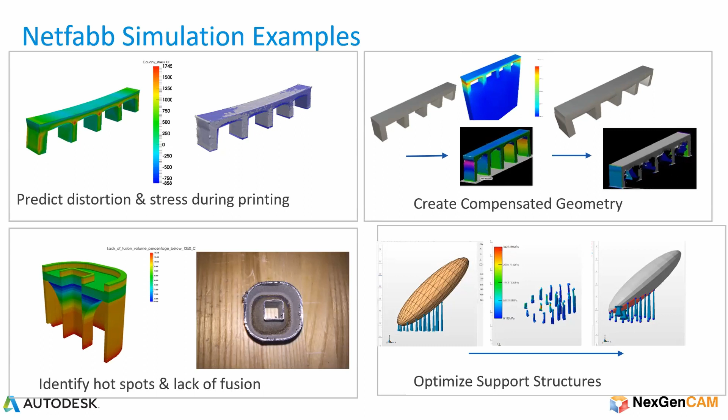So let's get into some of the examples that we have in here. Even past what we showed today, there's still a lot more capability than we can go through in just 45 minutes. Really what Autodesk is trying to do with Netfabb is bring the efficiency that we've had in the subtractive side of the market into the additive side, and simulate parts, plan ahead for parts, go through the stress and failure points that we might have, and produce good parts the first time around that are functional, that can help the whole team make better decisions and improve cycle times. That's really what Netfabb is all about.

In addition, we've gone over Netfabb, and one of the problems we highlighted at the beginning was that we need to look at this from a completely different perspective. And Autodesk is great because it has a comprehensive solution here. It's not just Netfabb; that's one piece of it. When you look at generative design and completely rethinking and revolutionizing the way that parts and solutions are made to solve problems, Autodesk can start at the front end with the CAD solutions, with Inventor and Fusion 360, and running generative design inside of Fusion 360.

Then we can come back in and do the FEA and the design validation, which would be done in multiple different FEA solutions that Autodesk has. Then you get into your 3D build preparation and your print simulation. And then finally, if you need to add in subtractive and additive together, you've got the PowerMill and PowerInspect solutions, which have been covered quite a bit, I think, in this whole online conference as well.

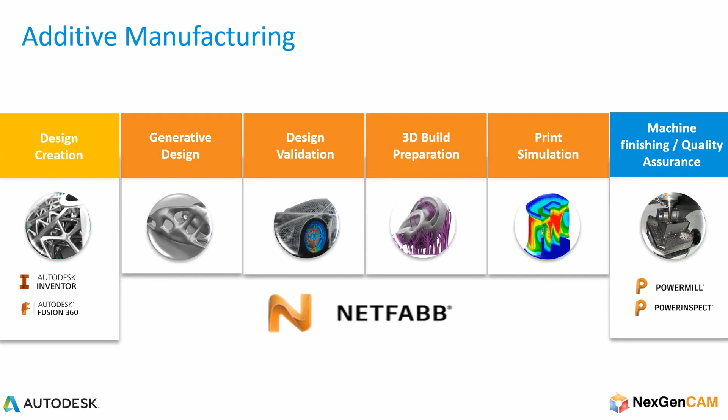So if you just look at this, the Autodesk Generative Design, and there's another whole hour session, so you should look at the schedule. If you're excited about generative design, go and find the other session that goes for a full hour into this. But this is really exciting that you can do design exploration, bring in the constraints, generate something, and then explore different options.

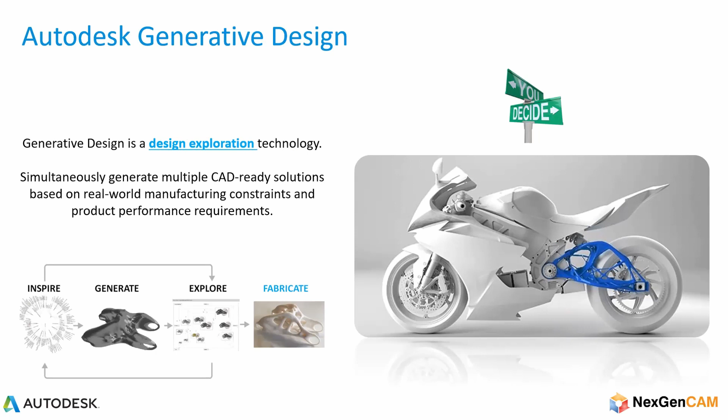And it's pretty interesting to me to see that it ends up looking a lot of times like a bone structure, the bones that are in the human body, like a design has been made, and that we're very efficient as humans. Just seeing the parts that come out of it is really exciting, and it's exciting to see some of these examples. Autodesk has an example of redoing the walls on airplanes. There's walls to put up a lavatory, and they worked with Airbus and redid all of those walls with thinking like this, with a lower weight and lower cost wall.

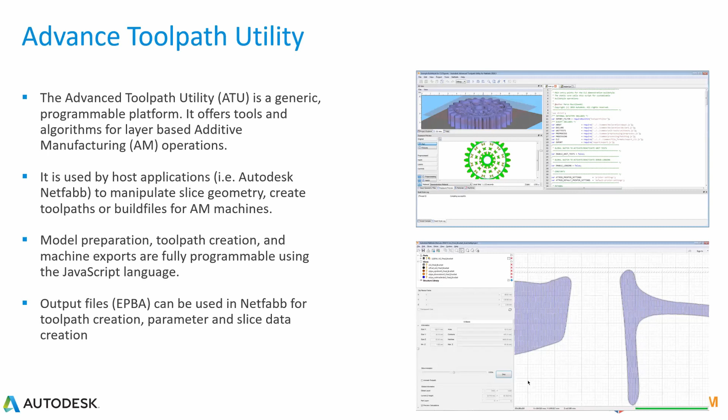It's really exciting. We'll just briefly jump over this, but Netfabb automation has its Lua scripting, so there's a lot of room for you to get into further automation. There's also an advanced toolpath utility that's provided that could take this to another level, creating things to an even further level of complexity.

And so in conclusion, we've taken you through this somewhat real world example, and we've gone from prototype up to professional and to full metal integration in these parts. It's been a lot of fun going over this with you.

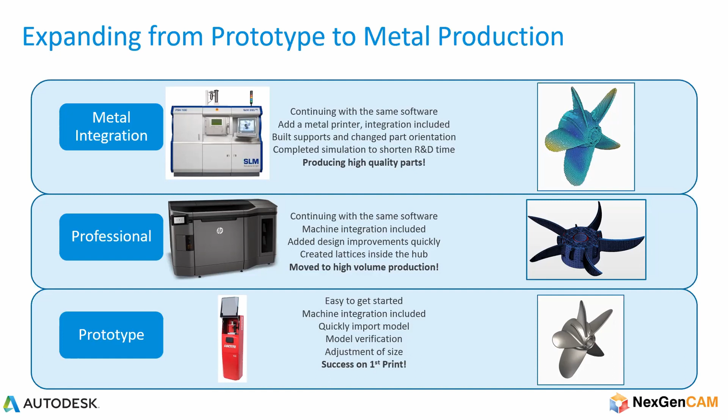And I hope that you take some of these nice takeaways here. Netfabb is that bridge. It takes you from the digital to the physical. It's a connected process. It's a platform for additive that you can use when your business is small, when your business is big. It's well integrated with all the OEM softwares that are out there. You can quickly and accurately improve your entire process, get the whole team involved, and deliver best-in-class results.